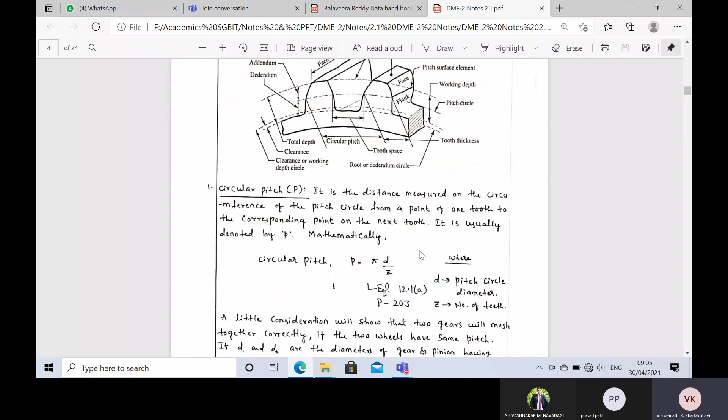Coming to spur gear terminology, yesterday I discussed with respect to circular pitch. Now we'll go for only the formulae related things, not the theory part. Yesterday I told you circular pitch P is equal to pi into D divided by Z. So this formula you will be getting ready-made.

As per the student's request, I have added the page number also. And for your reference, I have sent you the data handbook. If you don't have the data handbook, whatever pages I refer for the next class, I will put it in WhatsApp so you can refer to those particular pages and get to know the things.

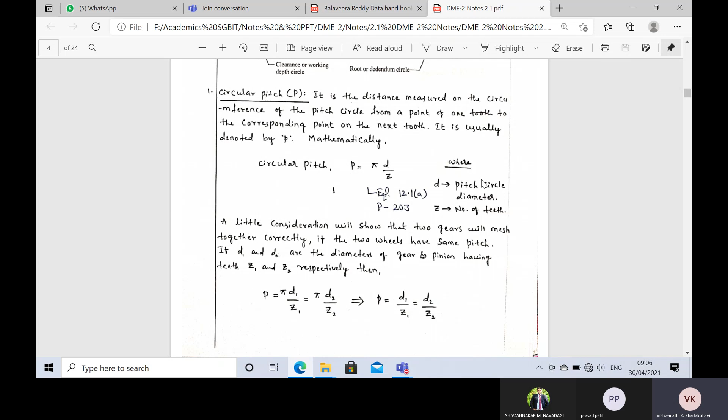Equation number 12.1a, page number 203. Here directly it is given P is equal to pi into D divided by Z. So all these formulas you will have in the data handbook. So you need not by heart the things, you only need to know where the particular formula is and which formula to use at what time.

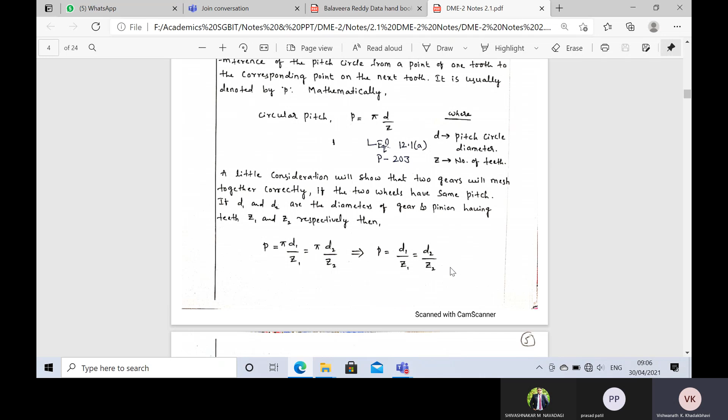Coming for this, the circular pitch is equal to D divided by Z, which I can modify for pinion as well as gear, that is D1 divided by Z1 is equal to D2 divided by Z2. This relation you need to know, at least. This is not available in the data handbook. Coming to diametrical pitch, PD is given by Z divided by D.

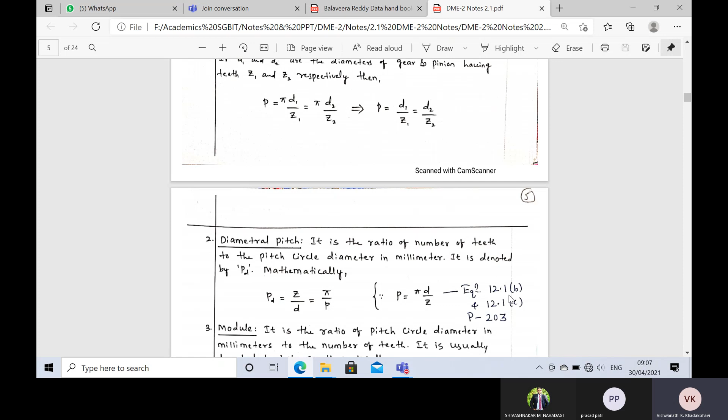So this P, that is circular pitch, is given by pi into D divided by Z, available in 12.1b and 12.1c, page number 203. If you see, it is having with respect to spur gears all the circular pitch, diametrical pitch, and the relation between circular pitch and diameter, all the main formulas are here. Even the center distance of the gears is available here.

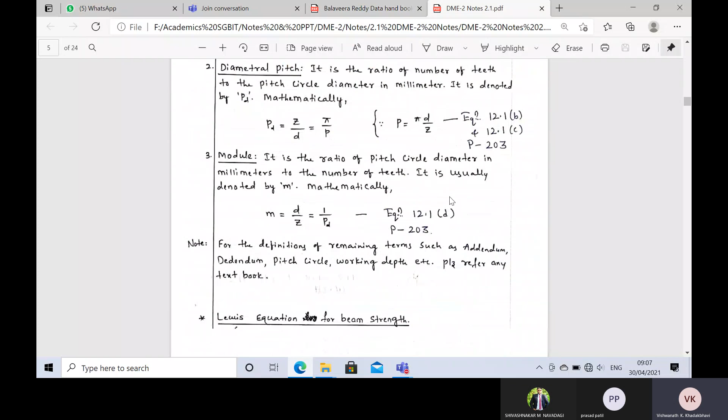So even for the module, if I want to calculate the module, module is given by D divided by Z. This formula is there in 12.1D, page number 203. So you can go for 12.1D to calculate the module if you know the diameter and the number of teeth on the gear or pinion.

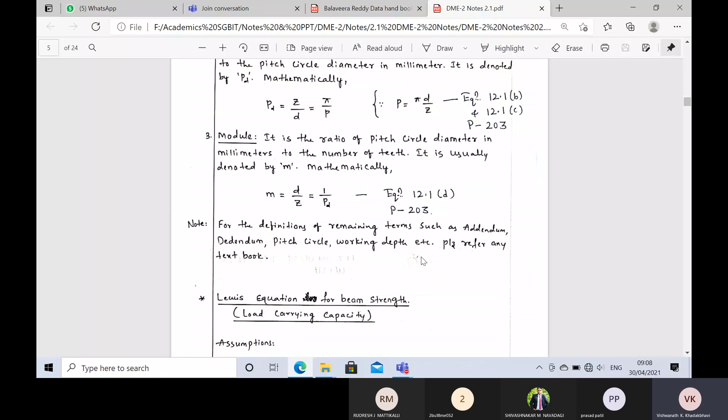Coming for the numerical, in the last class I had taken a simple numerical: a pair of mating spur gears having 20-degree full depth of module 5 mm. The pitch diameter is given with respect to the smaller gear, which we call pinion, its diameter is 100 mm. If the transmission ratio is 4:1, that is the velocity ratio, you need to calculate a list of things: number of teeth for each gear, that is Z1 and Z2, plus addendum, dedendum, whole depth, clearance. We'll see this while solving the problem.

So what is given? Alpha is given, that is 20 degree for the gears. M is given, module 5 mm. D1, that is D with respect to the smaller gear pinion, is 100 mm. I is given, that is the velocity ratio between pinion and gear. You already know I is equal to N1 divided by N2, equal to Z2 divided by Z1, equal to D2 upon D1.

So this is a standard formula which you need to remember. These are speeds, number of teeth, and diameters. Out of these three relations, whichever relation we want, we can take separately and calculate.

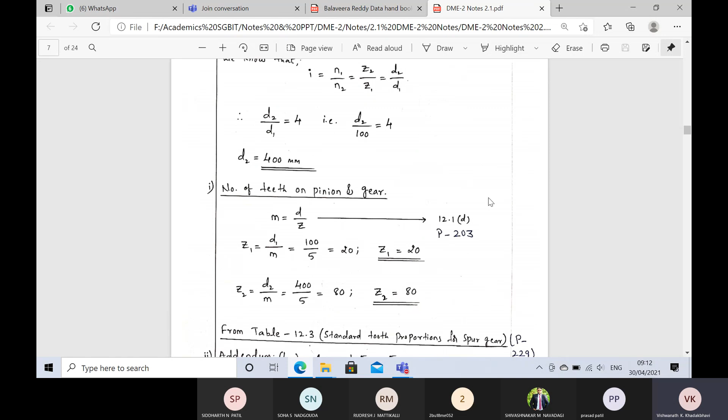What is asked in the question? We'll come to the question. He wants addendum, dedendum, whole depth, clearance, outside diameter and all.

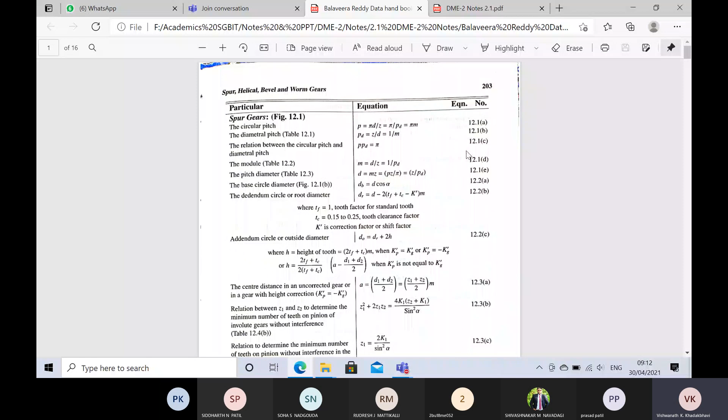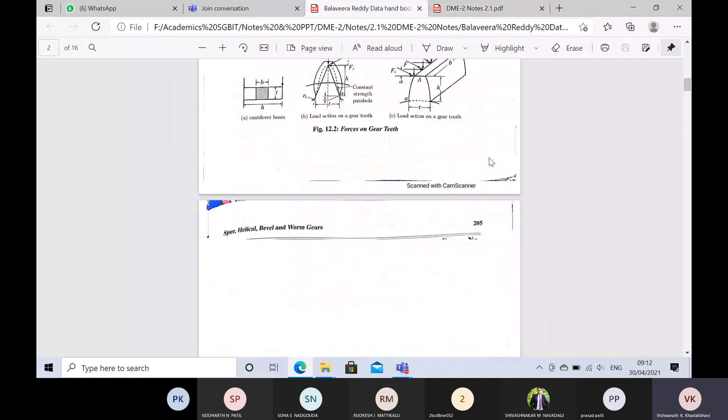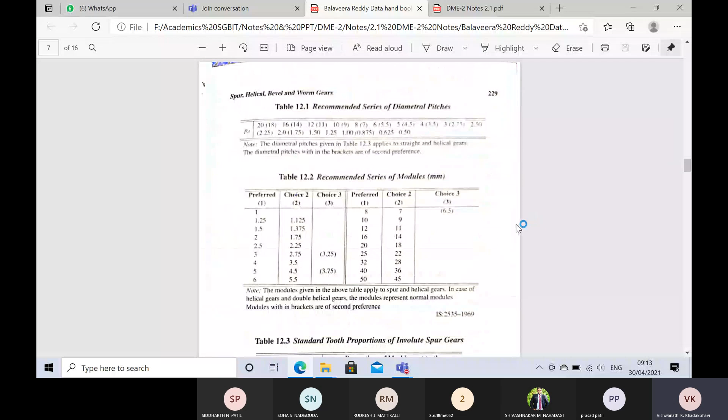So now if we go to the data handbook - just a minute. Yeah, if we go for this - okay, so in the data handbook, table 12.3, it tells us standard tooth proportions of involute spur gears is there.

So in this particular table, if I know the module, I can calculate addendum, dedendum, tooth thickness, tooth space and all. So whenever I know the module, I can use these proportions and calculate whatever is asked in the question.

So firstly, I will go for addendum, which is 1 into module, that is 5. So you can get all the relations with respect to the module. Now dedendum is 1.25 into m. So 1.25 into m is equal to 1.25 into 5. If you are calculating, and want some more time, I'll be going.

Sir? Yeah. Sir, that addendum, how you wrote that 1 into m, sir? You can see here in the data handbook it is given, m means 1 into m, that's all.

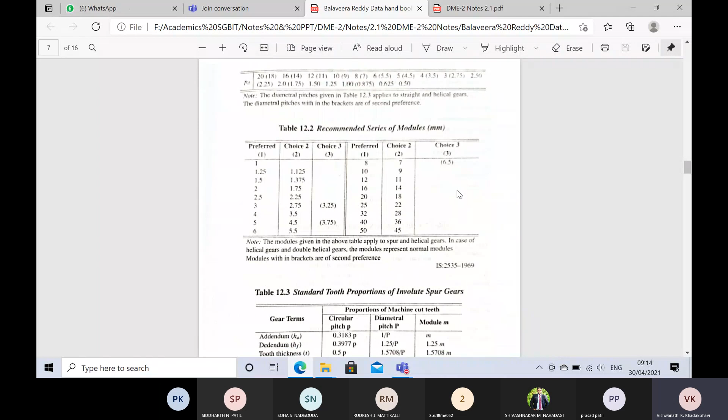In the data handbook, page number 229, table 12.3, you have to refer to standard tooth proportions of involute spur gears. In that, he has given it with respect to module, and with respect to diametrical pitch. If you know diametrical pitch, with respect to that you can calculate here. Calculation of addendum, dedendum, tooth thickness - all you can calculate.

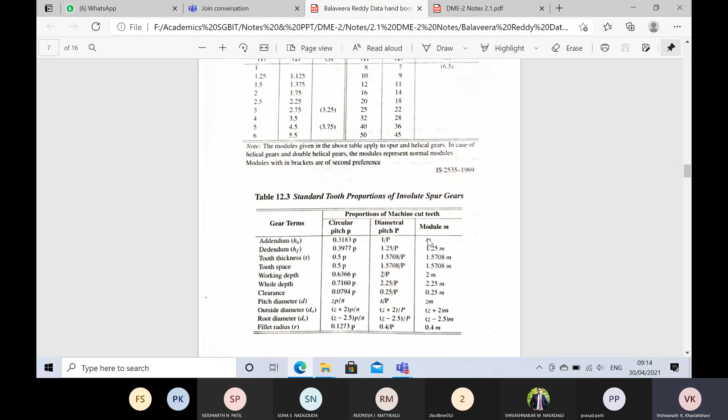Since I know the module, this addendum depends upon module, dedendum depends upon module. So all the relations he has given here.

Are you getting it, sir? My point, sir? Yes, sir. Yeah, m means 1 into m. That is same as module only. Okay.

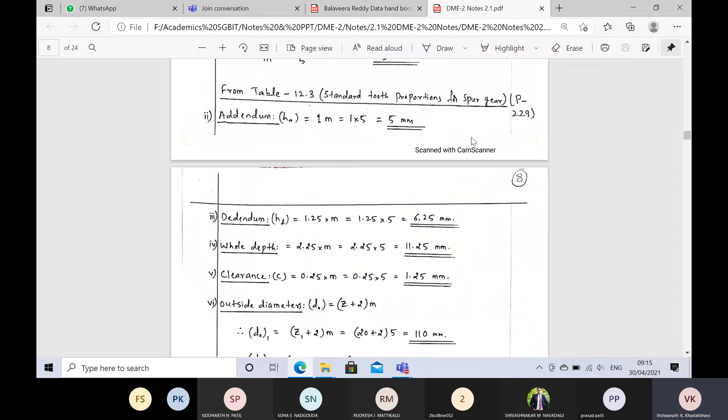So dedendum is 1.25 into m. So from this table 12.3, I can get all these proportions. So this is the actual gear design where I am specifying all the specifications of the gear in the form of addendum, dedendum, tooth thickness, tooth space, working depth, whole depth - whatever is told in the nomenclature.

So all these relations you need not memorize by heart. You only need to know where in the data handbook it is available. Okay, all the relations you can see. Some of the relations, if you want, you can calculate - it is very simple.

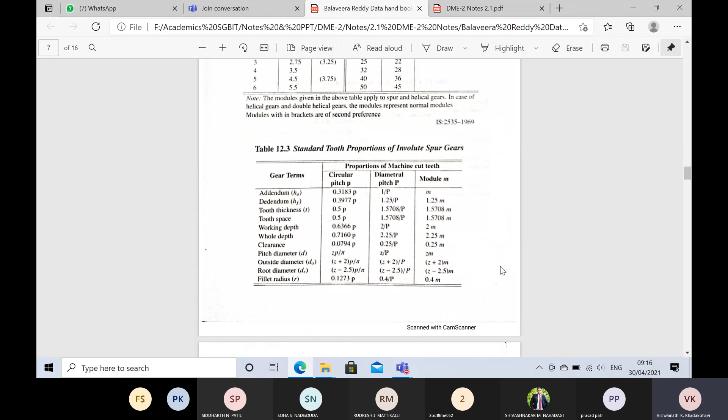So outside diameter you can calculate. It is given by Z plus 2 into M. So we'll see here - outside diameter d a, you are seeing.

Outside diameter d a is given by Z plus 2 into M. So outside diameter you need to calculate for pinion as well as gear. Whenever I am using it for pinion, that is da1. Z1, the number of teeth on the pinion, plus 2 into module, will be same for both gears. So 20 is the number of teeth on the pinion plus 2 into 5. 20 plus 2 is 22. 22 into 5 is 110.

Even I am calculating some of these in the calculator. I will be just calculating. So even if you want, you can calculate some of the things. If any mistake is there, please tell me. I calculated it and I have fixed it. But if you calculate, then only you can have a practice session. If you are just seeing, you may forget again.

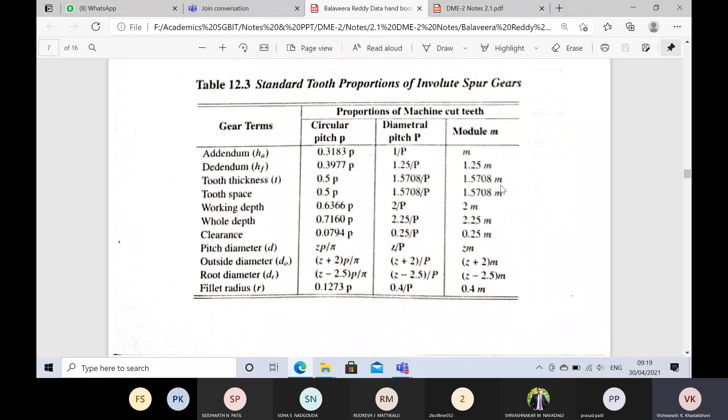So tooth thickness is also given. We'll see here where the tooth thickness is. If you are calculating all of this, irrespective of whatever is given in the question, if you are providing the extra answer also, there is no problem. So tooth thickness T you can calculate with respect to 1.5708 into module, and you will be getting the tooth thickness in the form of mm.

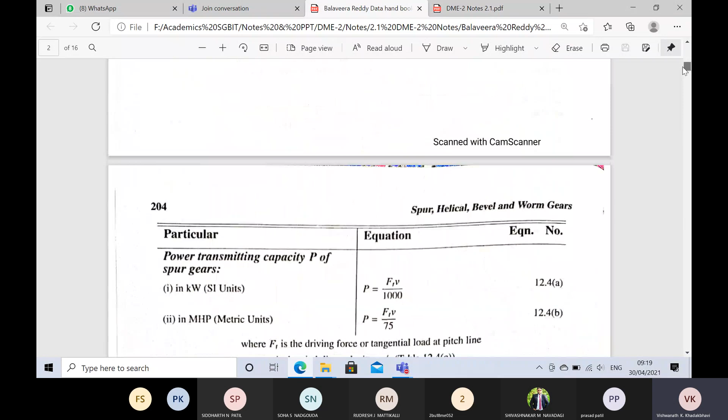In the same way, working depth. Now coming to circular pitch, as per the question, circular pitch is required. This you can get in 12.1a, that is page number 203, the first page in the data handbook that I have shared. 12.1a, circular pitch is equal to pi d divided by z. As per the question, I will calculate the circular pitch. Since I have got the module, and Z1 and Z2, I can calculate all of this very easily. So circular pitch is equal to pi into d divided by z.

It can also be given with respect to pi into m. Pi into module is circular pitch. You can see here, pi into m, he has given at the last. Circular pitch is given by pi d divided by z, also equal to pi divided by diametrical pitch, also equal to pi into m. So you can refer to any of these formulas to calculate the circular pitch. As I know the module, pi into m will be the easiest way for me. So I will be using pi into m, and I will be getting this answer.

Excuse me, sir. Yeah, tell me. So we can also use pi d by z. Yeah, you can use, no problem. Sir, in that case, in the case of d, do we have to put the d1 value or d2 value, sir? No, this circular pitch is general. If you want to calculate it for pinion, you can use D1 divided by Z1. If you are calculating separately, if D and Z are there, you can make it D1 and Z1.

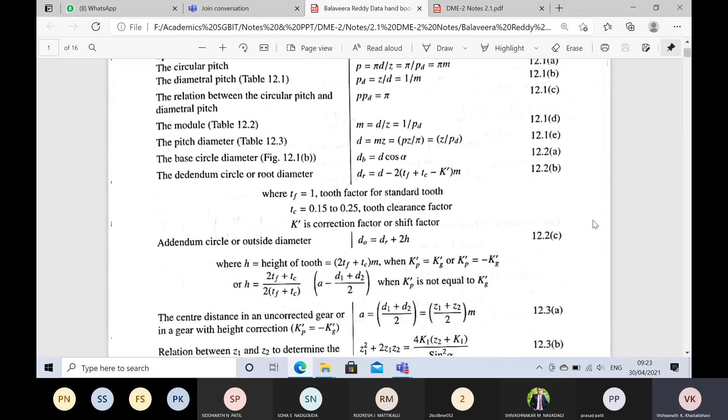Now coming to the center distance. This equation is 12.3a. You can see here, a is equal to d1 plus d2 divided by 2, or z1 plus z2 divided by 2 into module. In this case you can go for either formula.

But since I don't know the diameters, I'll be going with z1 and z2 divided by 2 into module. A part of module, where I know the module, so I'll go for this. Alpha is given by 20 plus 80 divided by 2, that is center distance between the two gears, which is 250. I am not going for d1 and d2, because if I go for d1 and d2, I'd have to calculate them first.

Sir, we know D1 and D2. That also you can use, then no problem. So for this problem, what we are doing is going as per the module.

I am using all the multiples of module, so better I am not changing the track here. You may have multiple options in between, but I am going for the multiples of the module so it will be an easy track for you. Are you getting my point? Yes sir, so I'll not go in a zigzag way, I'm going in a straight direction. If I know the module, I'll go for all the multiples of the module so it will be easy for me.

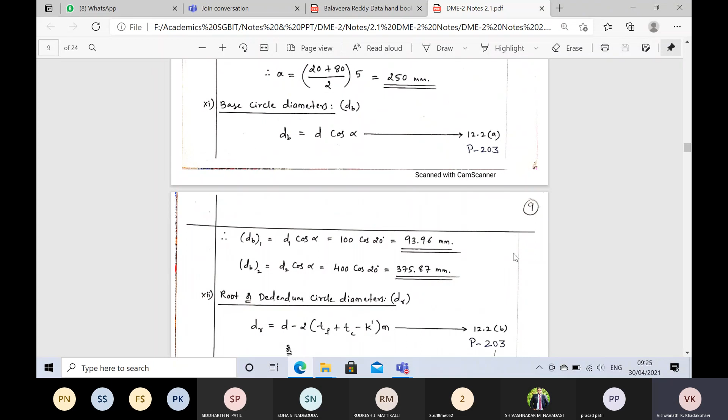For this I will calculate it separately, d1 cos alpha. So for base circle diameter of the pinion, I get 93.96. Just calculate and see whether it is correct or not. 93.96 is the base circle diameter for the pinion, and same for the gear. Same answer, sir. Okay.

Now as per the question, we'll see root or dedendum circle diameters. For this, I need to refer to page number 203, 12.2b. The dedendum circle or root diameter is given by dr equals d minus 2 tf plus tc, or dr is also given from the figure.

This point I will make clear in the next class, because from the figure we have to go further—this part you can leave off for now. In the next class I will get the figure and attach it here so it will be easy for you, because he is taking some constants, K, and how to select the K. So remember this part, even I will make a note of this. Yesterday also I told this.

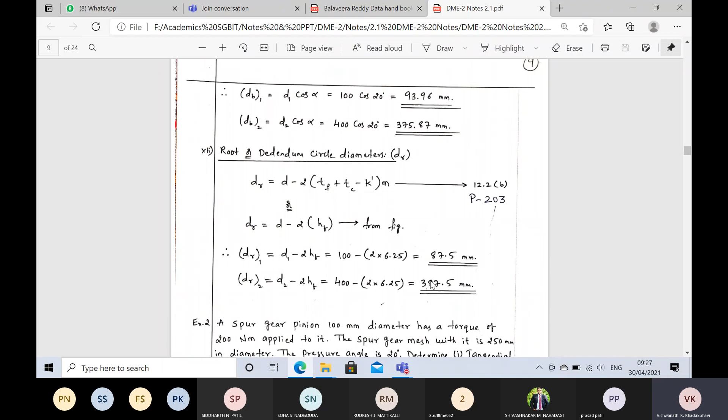Just a minute, I will make a note of this. It is page number 9. I will give the figure and explain this part.

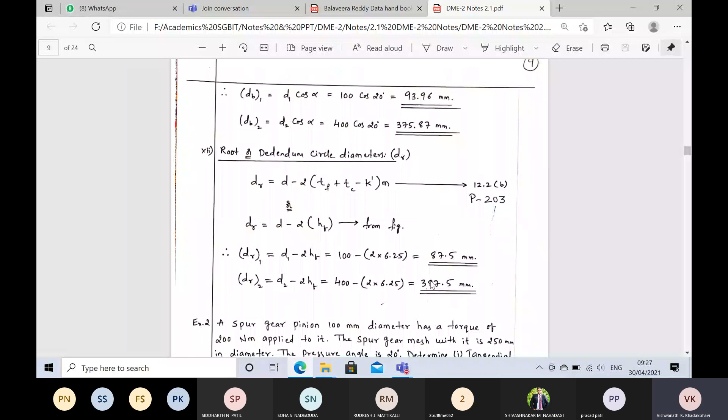Now coming to the next problem, we'll go as per the problem. I have selected some easy problems so you will become acquainted with the data handbook—where the addendum is, where dedendum is. Then slowly we'll move to tougher problems and solve a variety of numerical problems. When you solve more than 3 to 4 problems, you will start understanding how to refer to the data handbook and which formula to use.

Which formula I have to use for a particular problem—all will fetch the same results, but which will be easy for me in the exam so I need not waste time calculating. For this type of subject, the 3 hour slot is very less, so you need to take care of time so you can solve 100 marks within 3 hours. If he is asking addendum, dedendum and all, whatever he is asking, try to provide it. I'll just show you the example here.

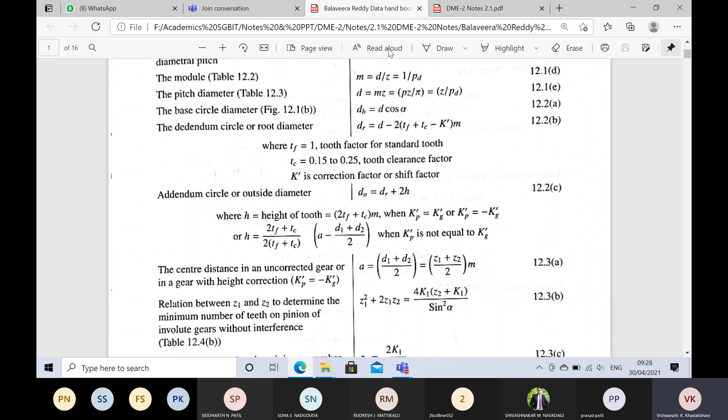As I told, addendum, dedendum, all this you can calculate and keep. But if he is asking only addendum, dedendum, tooth thickness, working depth - only 4 aspects - then you just calculate only those 4 things and keep it. Need not go for all these factors.

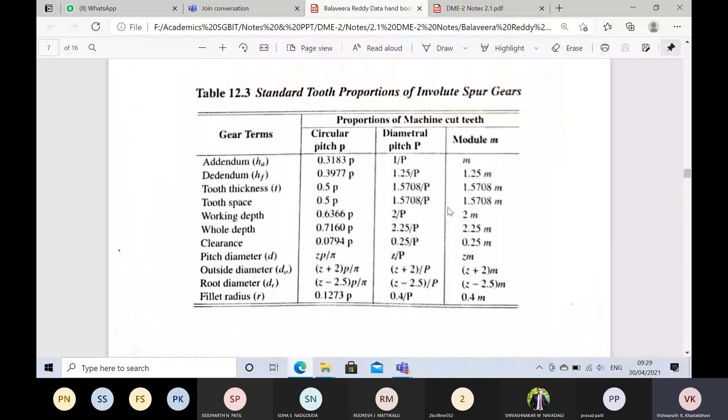Since you will be knowing the module, the student may think, yes, I will write all this, then sir will give me more marks. No. Whatever is there in the question, please provide only that much, because the data handbook is having abundant formulas. You cannot keep calculating all the things. So whatever is asked in the question, better go for only that type of answers.

Coming to the next problem, a spur gear pinion is having 100 mm diameter, has a torque of 200 Newton meters applied to it. The spur gear it meshes with is 250 in diameter. So he is mentioning the pinion as well as gear. Pinion is the smaller gear. If he is telling gear, then it is the bigger gear.

The pressure angle he has given is 20 degrees. Normally we will be using 20 degree involute gear, because it is more efficient and the noise will not be there whenever we are using the 20 degree involute gear. If he is not giving it in the numerical, you can assume it - write a note assuming the pressure angle is 20 degrees.

Such problems also we'll see in the coming sessions. So what he is telling is determine tangential force. This numerical is different from the previous one, because he wants to determine tangential force Ft acting on the gear teeth, radial or separating force Fr, and the torque coming on the gear. Also show the forces acting on the wheels separately.

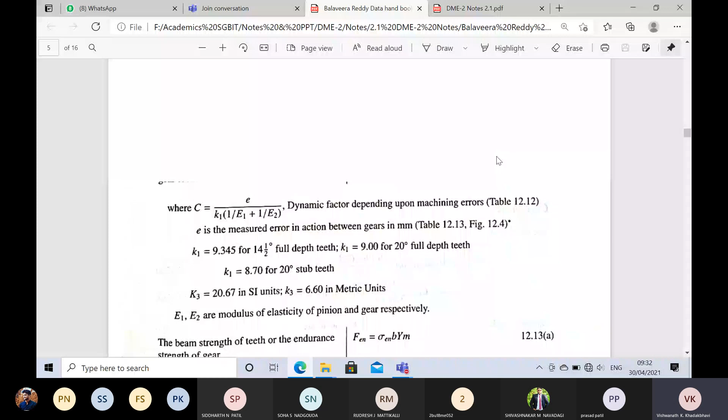Now we need to go for the tangential formula directly. Tangential force Ft is equal to 2 into mt divided by d, which is given in page number 206, equation 12.8a. If you go to this page, you can see the equations with respect to forces acting in a spur gear - what forces are acting, that you can get in this particular page. So Ft, tangential force or peripheral force as it's also called, is equal to 2 into moment, that is torque, divided by d. This formula we have to note down.

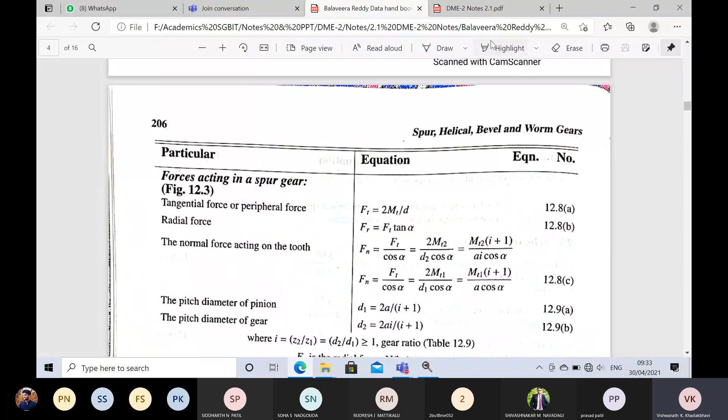Since we know mt, and since the pinion is the driver here, we are calculating the tangential load coming on it. So we'll use 2 into mt divided by d1, and Ft, the tangential force coming on the pinion, is 4000 newtons. Is the calculation correct? 2 into 200 into 10 raised to 3 divided by 100 - yes, 2 into... correct sir, 4000 newtons, yes.

So now again going to the data handbook, we can see the radial force acting. Fr is equal to Ft into tan alpha. When we know Ft, the tangential load, the radial force is a part of the tangential load into tan alpha. In the theory class, we had seen how the tangential force acts, how the normal force acts, and how we resolve it into tangential force and radial force. Is that part clear for you? Please reply, is that clear now? Yes sir, yes sir - or have you forgotten?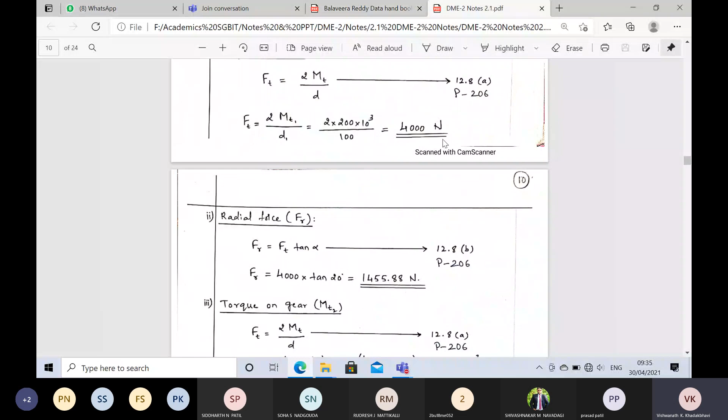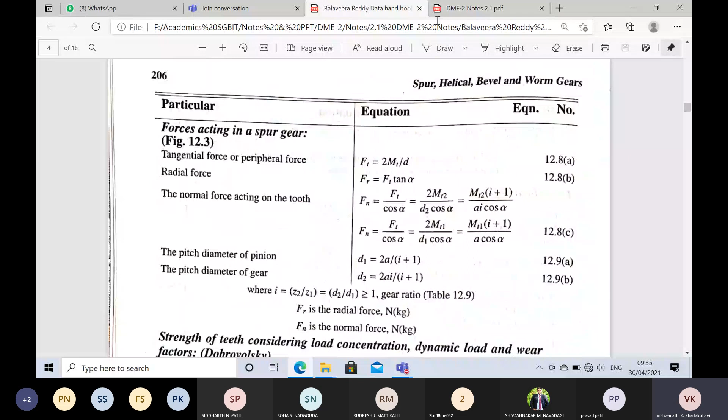Now coming to the torque on the gear. You can refer to 12.8a, and again refer to this so that you can calculate it for the gear.

The moment is given with respect to the pinion, as you can see here. In the question, he told a spur gear pinion of 100 millimeters diameter has a torque. So the torque given, 200 Newton meters, is particularly for the pinion, and he is asking for the torque on the gear. We have already calculated tangential force and radial or separating force, and now we need to calculate torque on the gear using the formula Ft equals 2 into mt divided by d.

The tangential force acting will be the same for the pinion and the gear, since both will be rotating. Since the pinion is the driver and the gear is the driven, both will have the same tangential forces. So applying the same formula, we now equate for the moment with respect to what?

The gear. So when I go for the gear, I need to use D2, and I am calculating the torque coming on the gear using the d2. So the torque with respect to the gear is 4000 into 250 divided by 2, which gives 500 into 10 raised to 3.

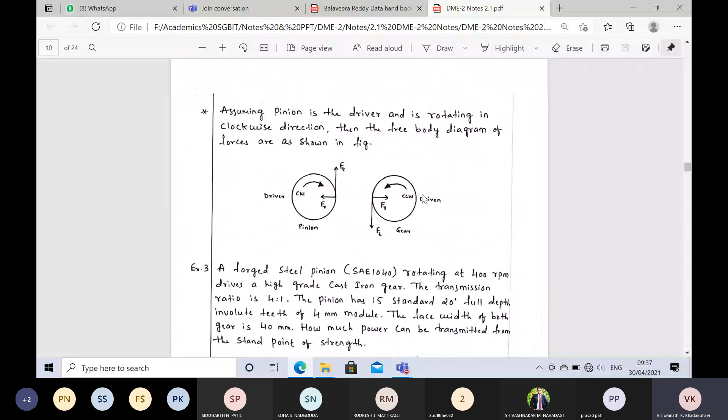Is it clear? In this problem I showed how to calculate tangential force, radial force, and torque. If you understand this, the mixture of these two problems will be the next, third problem. If you know how to calculate tangential force, radial force, torque, addendum, dedendum, and module from the data handbook, then we can go for actual problems.

Which is the third problem, where it contains the selection of material and again calculating the tangential force. This is a simple pictorial representation which is shown.

Ft will be acting on the driver, that is the pinion, and this is the gear. The same Ft will be acting in the opposite direction because it is rotating clockwise while this is anti-clockwise rotation. This Ft acts at this particular point and tries to act over here. This is also a pictorial representation showing how the radial force acts. The radial force always acts to compress and separate the center distance of these two, so this radial force is acting.

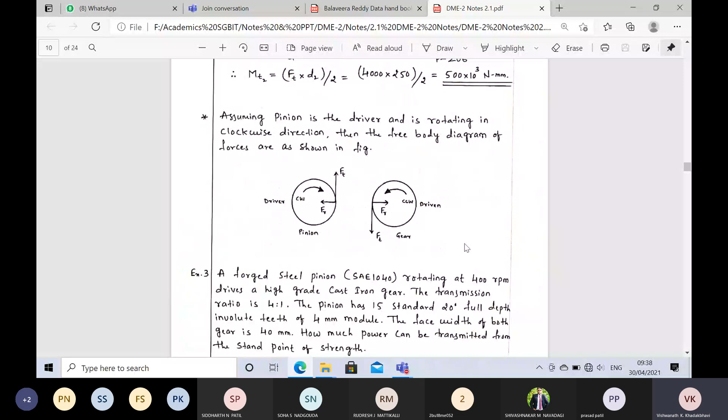Shall we go for the third problem?

Coming to the third problem: a forged steel pinion. Whenever he mentions a particular material, that material has certain specifications, so we need to refer to the data handbook. If it's not mentioned, we can assume it if necessary. In the previous problem, he only told us it's a spur gear pinion, with no material specified.

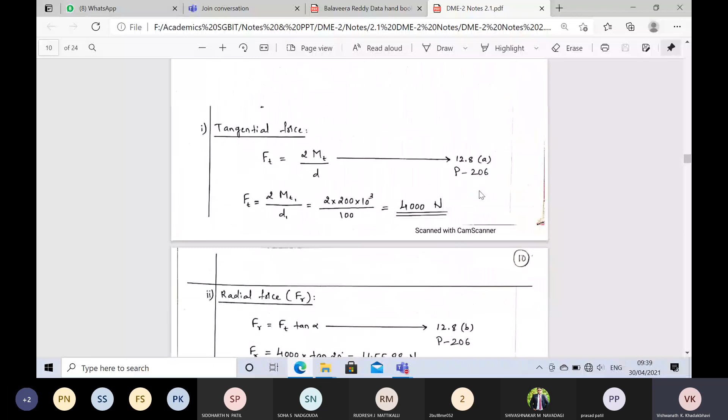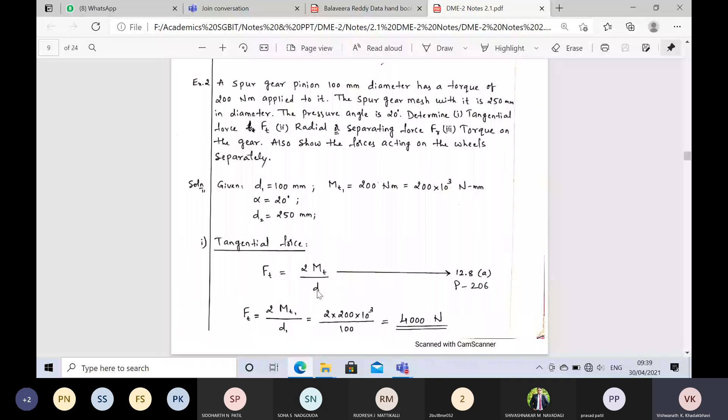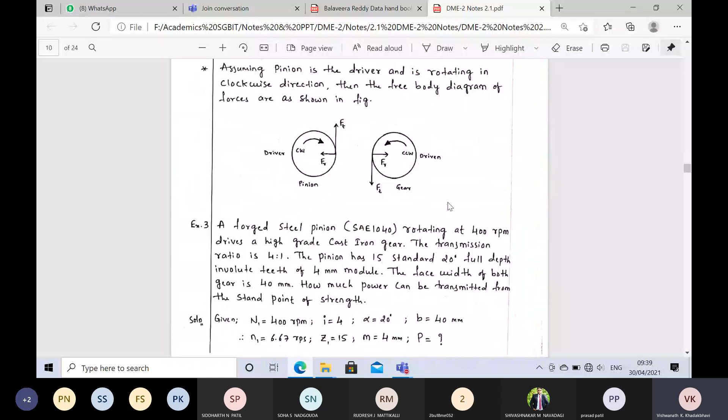To calculate the tangential force, radial force, and torque, I do not require any material, because the formula doesn't ask for material specifications. We will see the actual design when it comes with respect to material, so how to get the points from the material - if I am selecting a particular material, what things I have to collect from there so that I can put it into the normal formulas.

A forged steel pinion, identified as SAE 1040, rotating at 400 RPM, drives a high-grade cast iron gear. The transmission ratio is 4:1, which I have noted here as i.

The pinion has 15 standard 20-degree full depth involute teeth. So the pinion has 15 teeth, Z1 equals 15, which I have noted down. 20 degrees is alpha, make a note of this. 4 mm module is given, so m equals 4.

This module will be the same for the gear as well as the pinion. The face width of both gears is 40 mm as given. How much power can be transmitted from the standpoint of strength? So all this material specification is given: N1, the RPM at which the pinion moves, alpha, module, and breadth of the teeth. And what he wants is just one thing: how much power it can transmit. Are you getting this question?

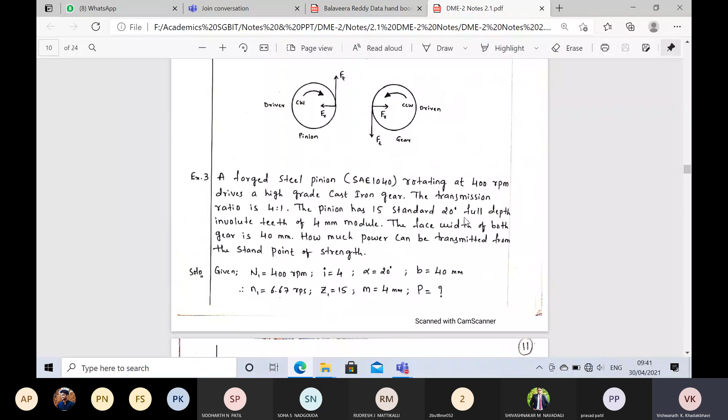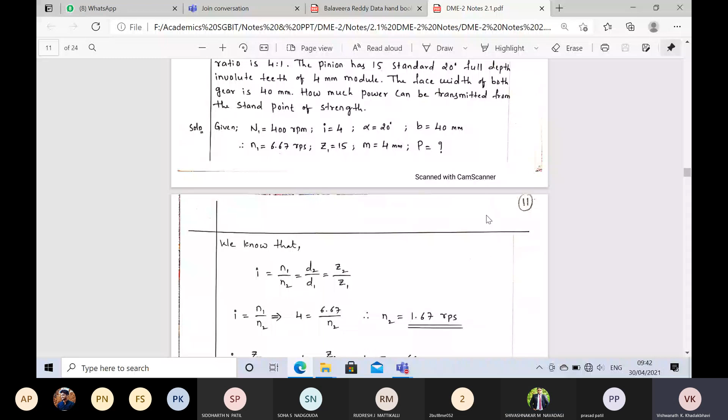Now, simple yeah. Sir, in that given data, small n1 you have written 6.67 RPS. What is that, sir? Rounds per second. 400 divided by 60 you make, you will get this. Just see.

Yes, sir, it is rounds per second, 6.66, 6666 it is continuing, so I have taken it as 6.67 RPS. So I am using it as small n1.

We'll see whether it can be used in between somewhere. So RPM I have calculated in rounds per second, that's all, 400 divided by 60. Okay, don't confuse with that. Any other questions here?

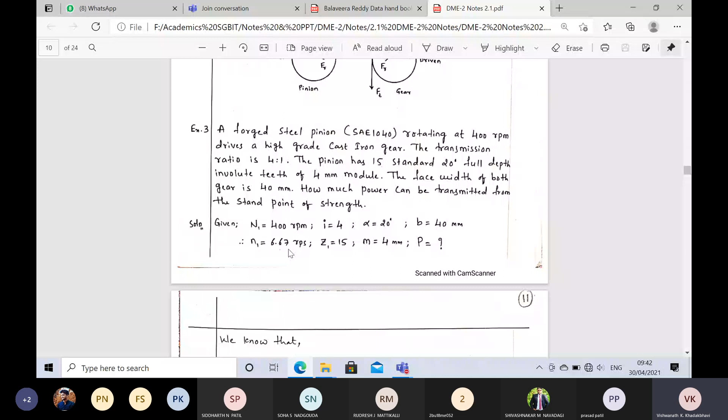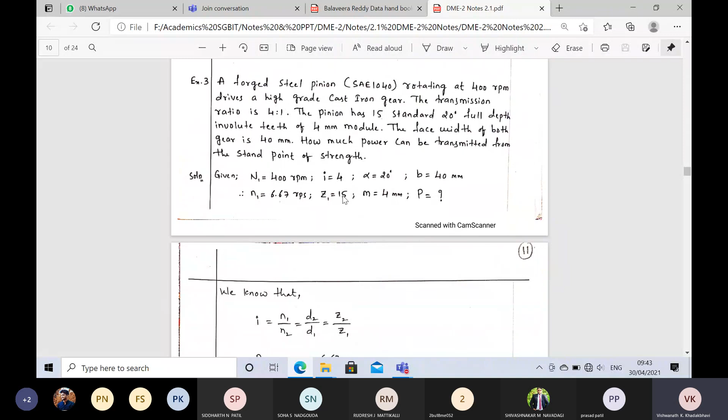So we'll go for, as per the previous two numericals knowledge, what we can do is we can go for the, if we know the velocity ratio I, and if I know Z1, then I can go for Z2. So we know that. This formula you need to remember, which is not available in the data handbook. I is equal to N1 divided by N2 is equal to D2 divided by D1 is equal to Z2 divided by Z1. So with respect to this, what I can calculate is I is equal to N1 upon N2.

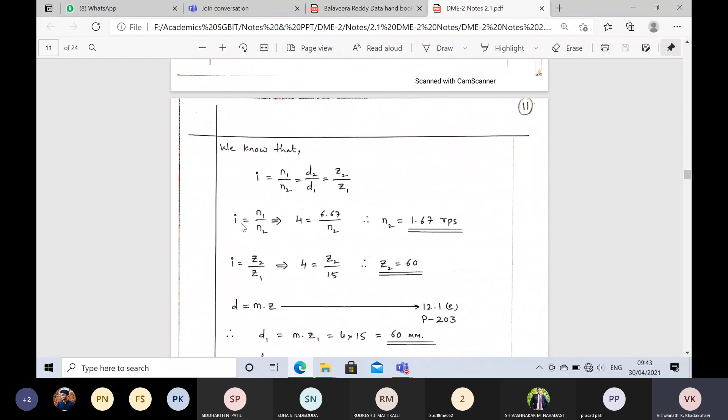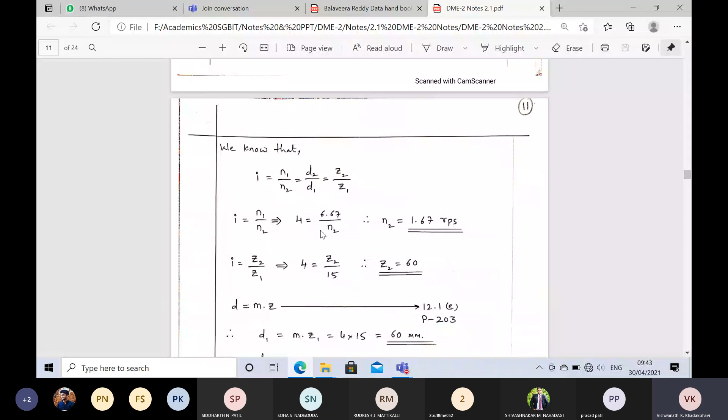So which is coming N2 as 1.67 RPS. If it is confusing, don't calculate this. You can go for in RPM only, so that you will get N2 RPM, because this ratio remains same. N1 divided by N2 remains same. So if you want, you can calculate capital N1 divided by capital N2, and you can calculate capital N2, which will be coming in the RPM. That will be the speed of the gear in RPM.

I is given, there is velocity ratio, with respect to I can apply with respect to Z2 divided by Z1. Since I know Z1, I can go for Z2, so that will be the number of teeth on the gear. It is given, means you are calculating it, it is coming 60. So 15 into 4 is 60. So for some easy calculations, don't go for the calculator. Better you can calculate 15 into 4, you will be knowing it's 60. So if any complicated things are there, then only you go for the calculator.

So now coming to this page number 203, which will be very important for us. So 12.1E to calculate the diameter, that is D1 and D2. Since I know the module and Z1, that is the teeth on the gears, I'll be going for page number 203, 12.1E.

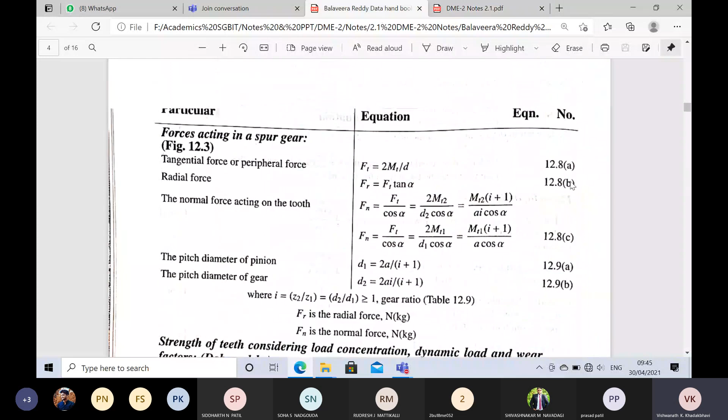So I can calculate D1 and D2 with respect to this formula. So what I have done is, by referring D is equal to mz, D1 is equal to m into Z1, that is 4 into 15, 60 is coming, the diameter with respect to the pinion. D2, m into Z2, that is 4 into 60, 6 4s are 24, it will be 240. So 240 mm you will be getting the diameter of the gear.

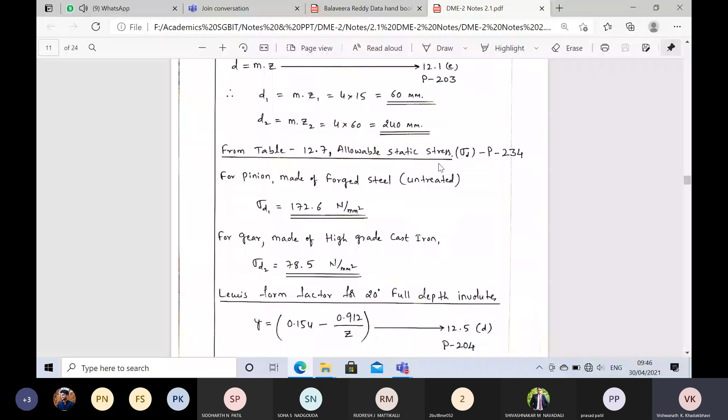Okay, so these are the minimum specifications which we require for calculating the next coming steps. So for this next step we will be going for, you can see, for referring the table 12.7, we need to go for allowable static stress. So we have to go for the stress, how much is coming on the gear. So that we need to know, because he has given the materials. So we'll see that table, then you will understand. So this is page number 234.

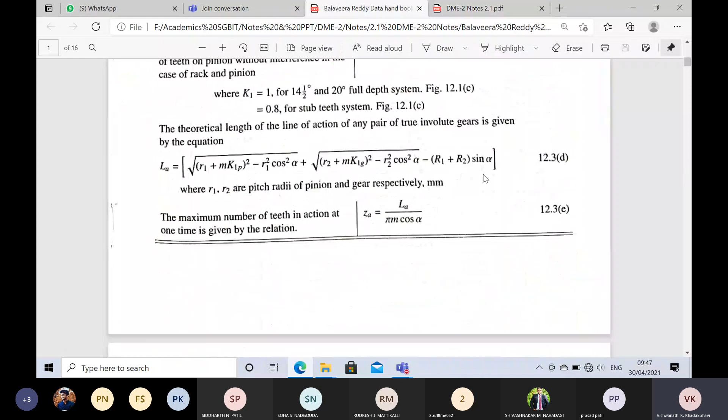Yes, what it contains is, page number 234 tells that table 12.7, table 12.7. So it is having allowable static stresses to use in Lewis formula. As you know that Lewis equation is for the spur gears. So you need to go with respect to that Lewis formula so that you can calculate the power. So here, if we see this table, we are having material.

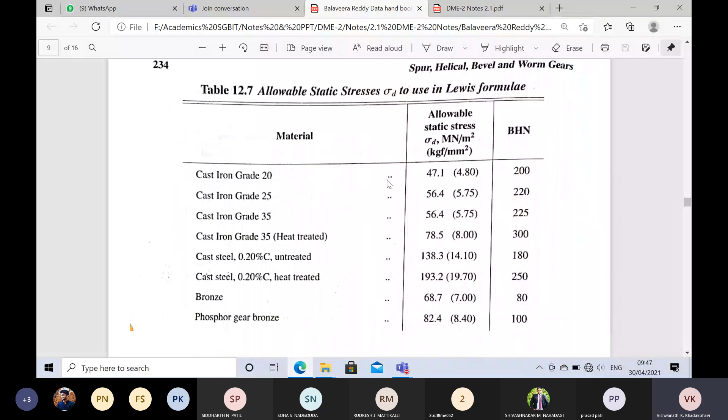Different variety of materials are there with respect to the gear and pinion. Cast iron grade 20 is there, cast iron grade 25 is there. With respect to this, what he has given is allowable static stress, that is, this much static stress the material can sustain. So within this maximum limit, the static stress will be there for this. You cannot exceed this number. If you exceed, again the failure will be there.

So you have to take this allowable static stress, and you need to know the Brinell hardness number for this particular material. So since he has given the material in this particular problem, I need not have to choose any material for the gear and the pinion. So what he has given as material is, I'll go for the material now. For pinion, he has told forged steel untreated. So I will be going for forged steel untreated here.

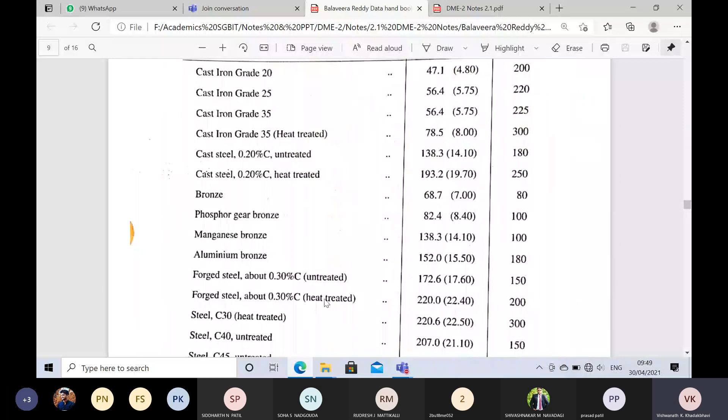Yes, forged steel untreated. For this, the allowable static stress is given by 172.6. So this you need to take as allowable static stress. For the forged steel, 172.6, same I have taken. Yes, 172.6 meganewton is given.

Meganewton per meter square he has given, so I can write it as Newton per mm square. This conversion you know, no? Meganewton per meter square can be written as Newton per millimeter square. You know this, or I need to calculate it? Megapascal is 10 raised to 6 Newton per meter square. So if I want to convert meter square to millimeter square, in the denominator I will be having into 10 raised to 6. Numerator 10 raised to 6, denominator 10 raised to 6 will cancel, and we can write it as Newton per millimeter square. If this you have not understood, in the next class I will have that slide also.

So just collect this 172.6, that is allowable static stress. For gear, high grade cast iron is used. So I need to search high grade cast iron in this table.

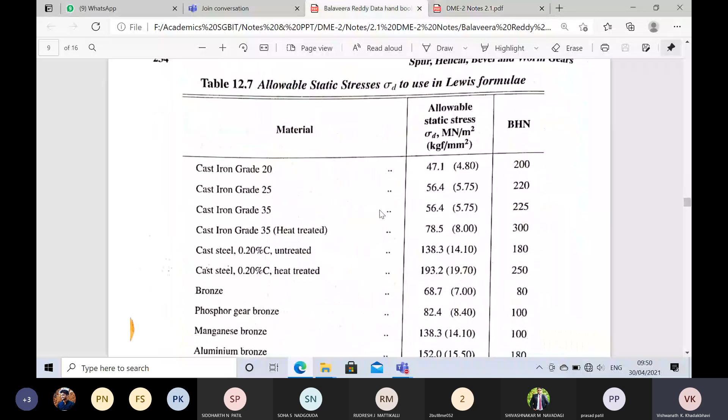So cast iron, high grade in this. High grade means grade 35 is the high grade here. So for this I used it as 78.5. High grade heat treated you can use 78.5. In cast iron, grade high means 20, 25, 35 - only three varieties there. Of this, high is 35. In this again high is 78.5. So this you can use for your calculations, that is 78.5, and Brinell hardness number for this is 300. So make a note of this.

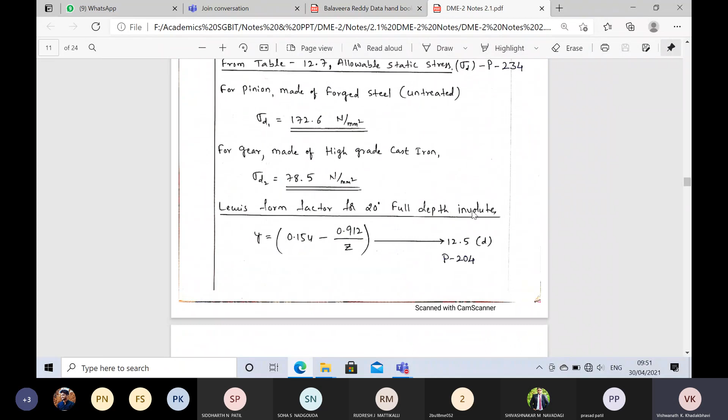This is the allowable static stress which we will be using in the Lewis formula. So just make a note of this and we will proceed with respect to the Lewis formula.

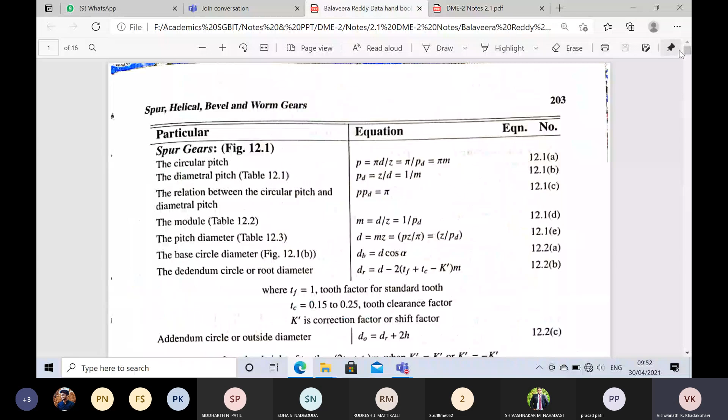Since from Lewis form factor we know, we'll go to Lewis form factor, that is 12.5D, page number 204. So here Lewis equation is given. With this Lewis equation, what we can calculate is what is the tangential force coming on this particular gear. So what I need to do now is calculate Y.

It is given in 12.5D because I require all these factors which are coming here. If I am going for Lewis equation, I will be calculating the tangential force. So tangential force I require pi into this static stress, CV, V, Y, M. So I will be preparing all this and equating here, and I will be calculating the tangential force coming on the gear. Now coming to this equation which is 12.5D.

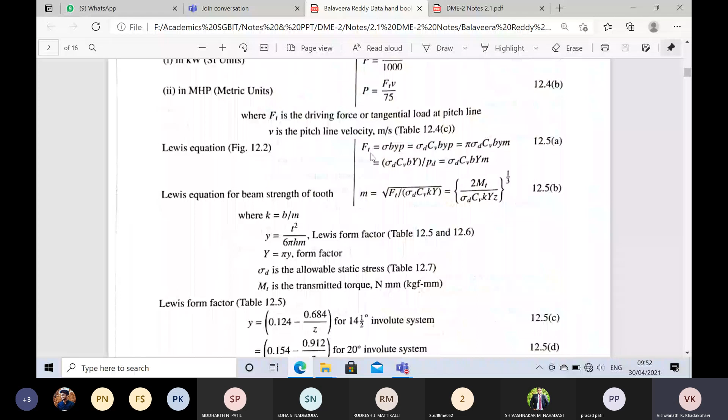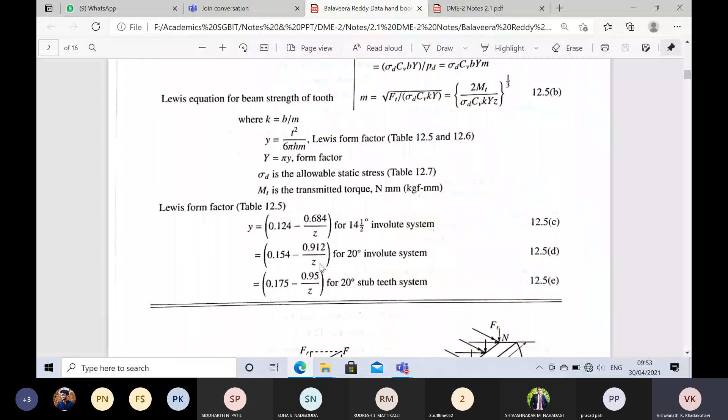12.5D is the Lewis form factor calculation from table 12.5. So this small y we can calculate, that is 0.154 minus 0.912 divided by Z. Again Z for 20 degrees is given. So separately you can calculate Y1 and Y2 by using Z1 and Z2. Please calculate this and tell me whether this answer is right or not.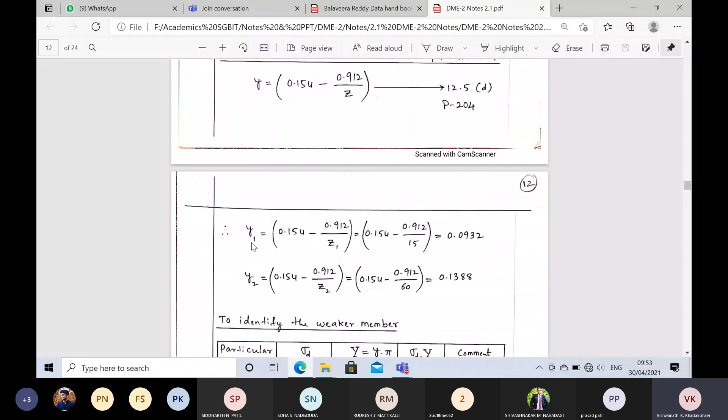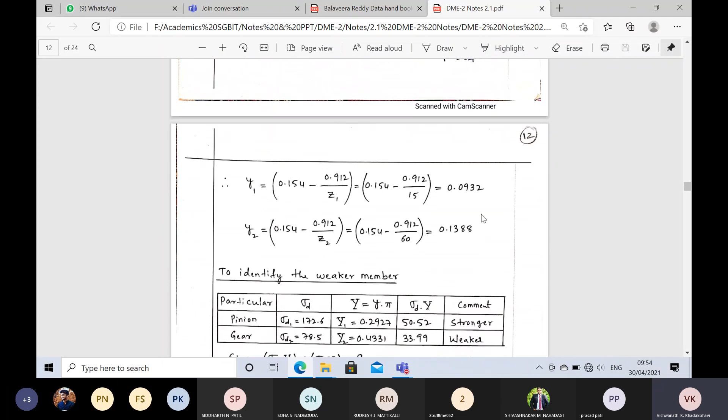0.154 minus 0.912 divided by Z1. Whenever we are calculating for Y1, Z1 we are calculating. Z1 we are getting it from as previously we had calculated. So Y1 and Y2, this is small y1 and small y2. Are the answers correct? Please reply, sir, okay.

Now see, I have made a small table here. If you make such tables, it will be easy for you. So now pinion and gear, allowable static stress I have written. Y, capital Y, which is required in the Lewis equation - Y is equal to small y into pi, that formula is there. So Y1 and Y2, capital Y1 and Y2, I have calculated by multiplying these two numbers with respect to pi, and I have kept it here. And this I'll be getting with respect to multiplication of these two, that is static stress into Y. So I have kept this.

So this factor tells us which is stronger and which is weaker. Here pinion is more stronger, as we are seeing its allowable stress is more, that is 50.52. So pinion, irrespective of size, due to the material, I am getting the allowable stress more and it is more stronger. Gear, since the size is also bigger plus its material is different from the pinion, this will be a weaker point here as compared to the pinion. So our study should always go to the weaker part. So in the coming slides, if I am calculating for the weaker part, then this will be safe. I have to take care of only the weaker part. So whenever I am calculating, if I am taking care of only this weaker part, then my design will be safe.

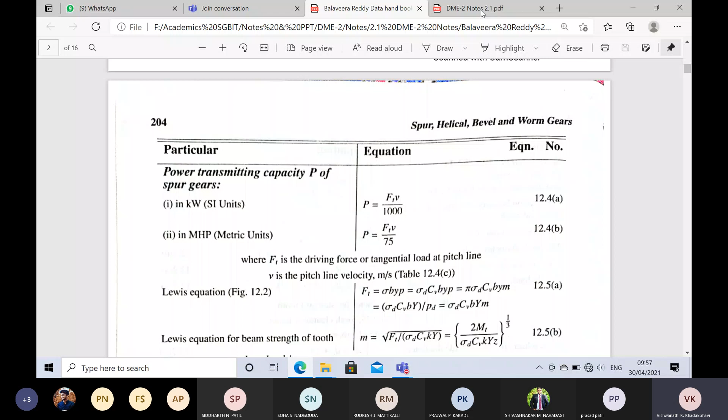Considering this power requirement, the tangential force Ft will be taken with respect to... Ft is the same as whatever I calculated in the previous slide. No, you haven't calculated it yet, right? We'll see. Ft will be calculated with respect to the form factor, capital Y, small y, and all. So we'll come up with Ft into V divided by 1000. V, as we know, is pi dn upon 1000. Since we are calculating for the weaker point, that is the gear, we'll go for pi dn2 divided by 1000.

Now coming to Ft, which is the Lewis equation, we need to calculate this to get the power. Ft is given by pi into static stress, Cv, B, Y, M. If we know all these factors and evaluate them, then finally the power required will come out to be 4.8 kilowatts for this particular example.

So this formula is easy, but the selection problem is here. Pi we know, allowable stress we know, Cv we need to get from equation 12.6a on page 205.

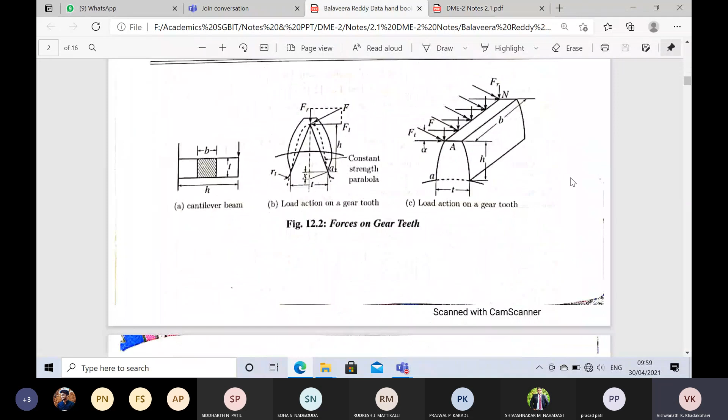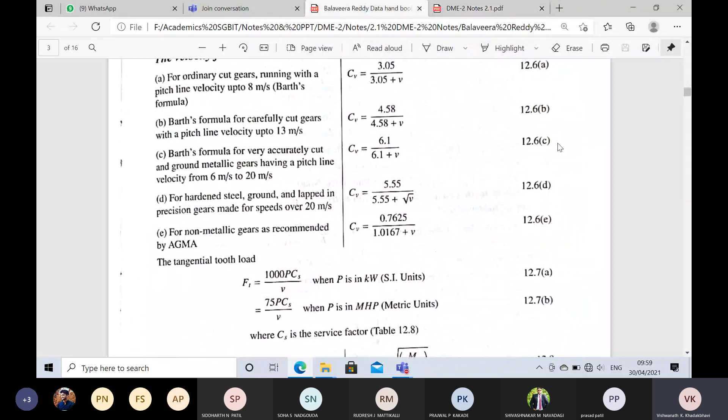The velocity factor is given for ordinary cut gears running with a pitch line velocity up to 8 meters per second. Normally we'll go with the velocity factors given for different cases. Here it's Barth's formula for carefully cut gears with a pitch line velocity up to 13 meters per second. We'll go for the nominal one, not the carefully cut or high precision cut, unless it's mentioned in the question.

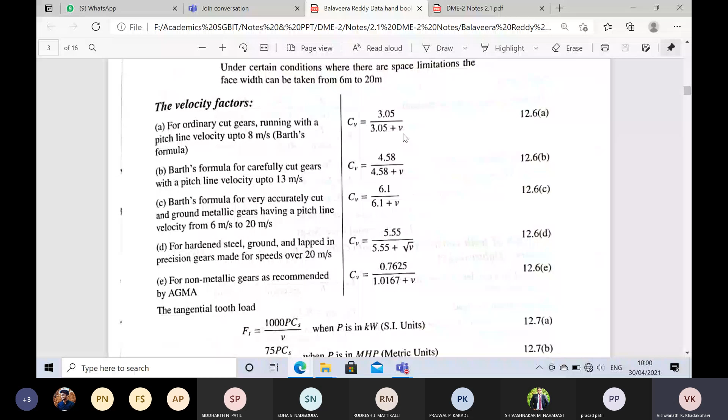So we are taking the velocity factor Cv equal to 3.05 divided by 3.05 plus V. With respect to that, as we know V is 1.257 meters per second, we calculate Cv, that is 0.708, the velocity factor.

Since we know pi, the allowable stress, and Cv, now B, the breadth of the teeth, is given in the question, and Y we have already calculated. This is Y, y1 and y2 — we are designing for y2, that is gear. We'll use 0.1388, and we also know the module. So all the factors are known and we can calculate Ft.

So Ft comes out to be 3878.4 newtons. Using this in the power formula Ft into V divided by 1000, we get 4.8 kilowatts by using this equation. Is it clear?

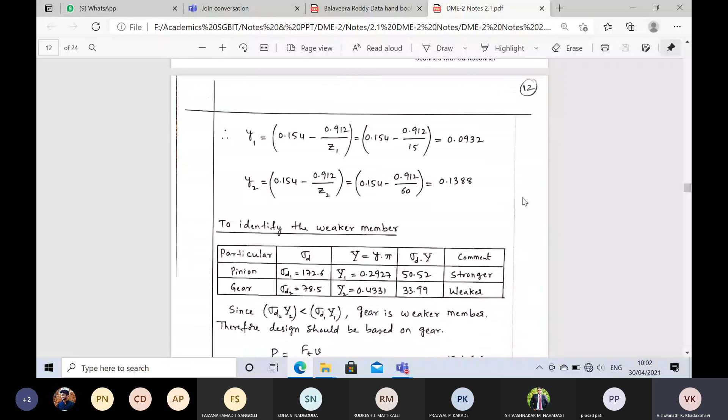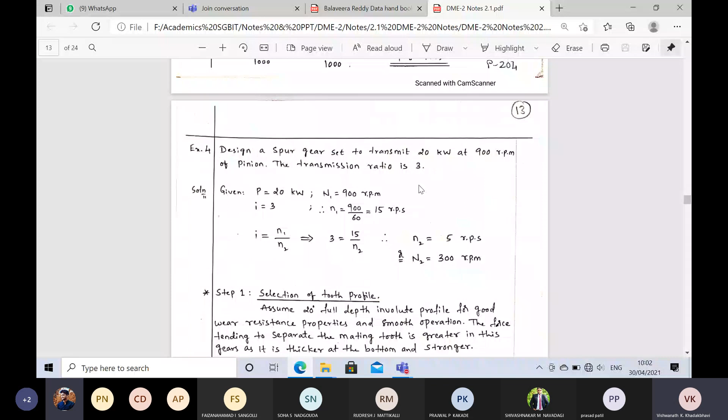So have you understood this problem? Yes, sir. If any doubts are there, please let me know. See, my suggestion for you is, now whatever you have written...